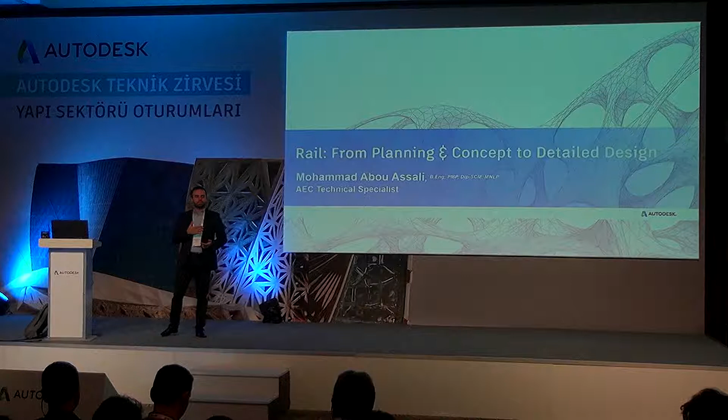I am a civil engineer from Lebanon. I just know a little bit of Turkish because I love Turkey, so I started learning Turkish this year, still in the first course. Okay?

Today's session is about infrastructure. The first session will be about rail design. The second one, we will talk about road rehabilitation. And the third one is going to be about construction planning - how we can use InfraWorks to basically manage the construction site and analyze how we can, for example, lay the site, get the construction vehicles into the site, etc.

So the first session is about rail. As you know, we have too many rail projects going in the region. Specifically, if you go to the Gulf states like Qatar, United Arab Emirates, you will find a lot of projects, and even in Saudi. Definitely that's the same case in Europe as well.

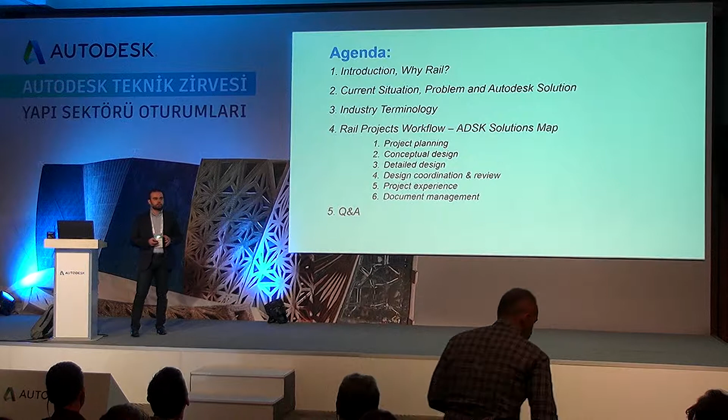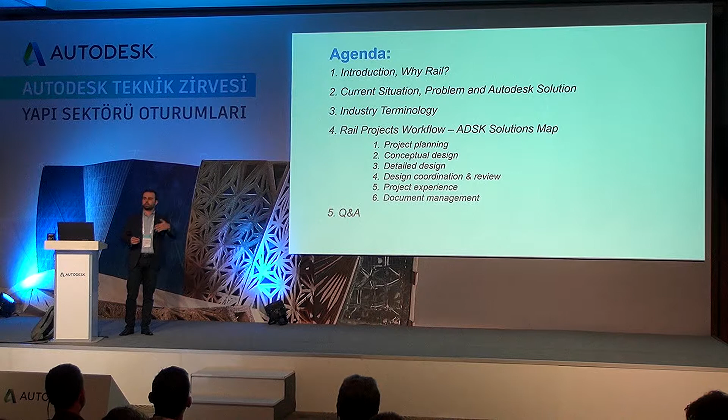So today's agenda will be like this. We'll go about what is rail, what is the situation, the current problems, what is the industry terminology for those of you who don't know about rail. Then we'll go about the rail project's workflow, because with Autodesk, we have many different tools, many different software, and these tools speak to one another - we start with one, we move to another, to a third one, and so on. And finally, hopefully we'll have some time for questions and answers.

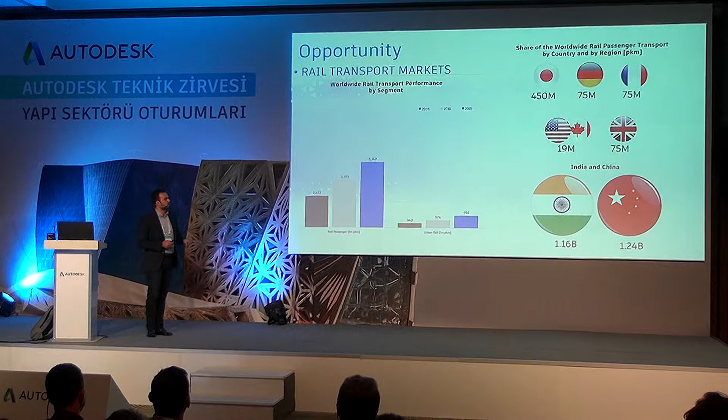So why rail and why now? If you check worldwide, there are many studies done by companies like McKinsey and others about the investment in rail projects. If you look at this part, it's about rail passengers per kilometer per hour. You see there is an increasing trend from 2005 up to 2025. All of the countries in Europe, even Canada and the States, are investing heavily in rail. And the biggest investment in rail is being done currently in India and China.

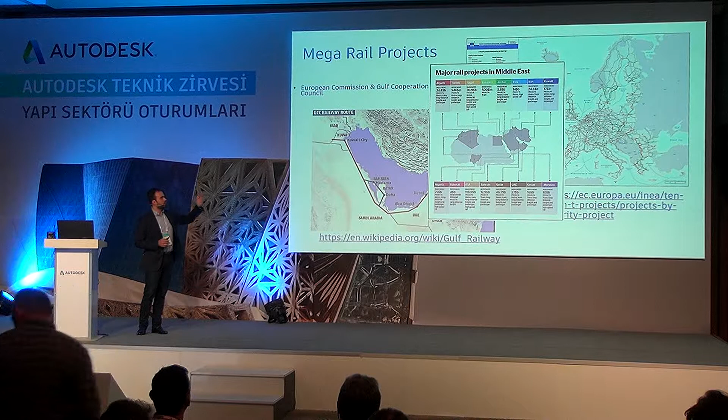In the Gulf region, there was a very optimistic project of connecting all the Arab Gulf states together, but due to the fall in oil prices and the tensions over there, they stopped it for the moment. A lot of investment is going in Europe, with the European Union connecting all of the major cities together. Even in Africa, if you check the studies about Kenya, East Africa, and even North Africa, we do have a lot of projects involving rail over there. So billions, hundreds of billions of dollars are being invested into rail projects worldwide.

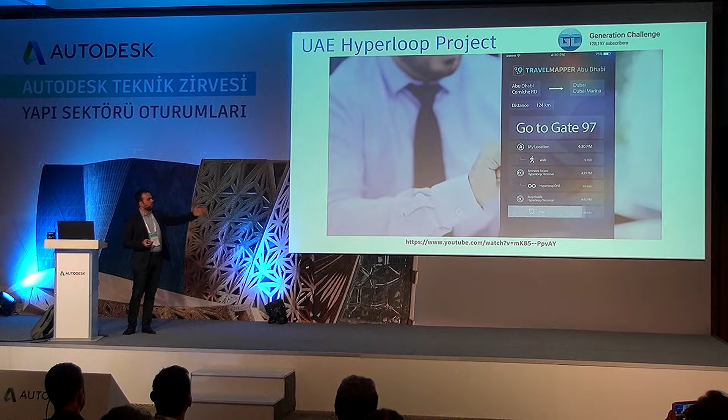Another example of a very futuristic project - I don't know if any of you heard about the Hyperloop project in Dubai. It's basically connecting Dubai to Abu Dhabi. So what they're planning to do is connect the capital, Abu Dhabi, to the city of Dubai using a very futuristic technology of a tube with cabins that move at very high speeds. By just booking your cabin, you're able to move from Abu Dhabi to Dubai in a matter of minutes. Usually nowadays, going from Dubai to Abu Dhabi takes around 1.5 hours. They're planning to reduce this time to around 12 minutes, so just 10% of the time.

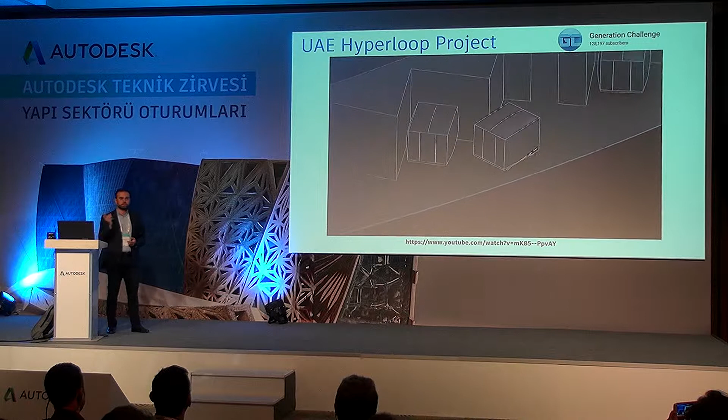And this project is actually being tested. The company working on this Hyperloop project has developed some prototypes, and they're checking those modules or cabins inside the pathways at a very, very high speed. So these are the modules which people get into, and these modules move into a certain container, and that container goes at speeds of 500, 600, and maybe more kilometers per hour.

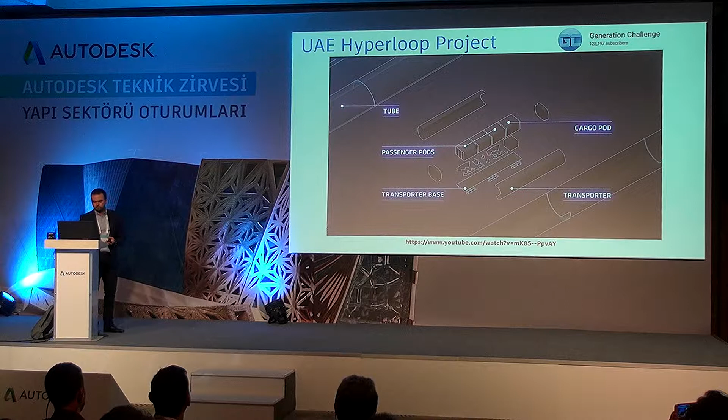So this is where we're heading. This is a rendering of how the Hyperloop tube will look like. As you can see, they're tracking the time from when the person goes from Abu Dhabi to Dubai, till the time he gets to Dubai, which is going to be monitored with stations and other things as well - reducing the travel time by 90%.

So a lot of disruption, a lot of new technology, but what are the problems? We do have a lot of problems nowadays in our world, and it's more often that the engineers working on vertical construction, like architects who probably will design the metro stations, and the civil engineers who are working on the rail tracks, the horizontal alignment, would like to coordinate or collaborate together.

So the major products from Autodesk that highlight those issues are definitely Revit for vertical. We have Civil 3D for the rail tracks.

We have the BIM 360 platform for collaboration, Navisworks for clash detection, and InfraWorks for project communication and visualization. If you look at official Autodesk presentations for rail design, you're going to find something like this. I'm not going to bother you with this, I've developed something more enhanced which I'll share with you in a couple of minutes.

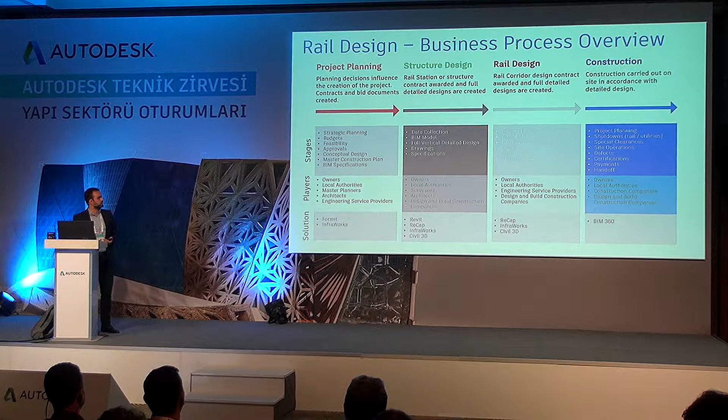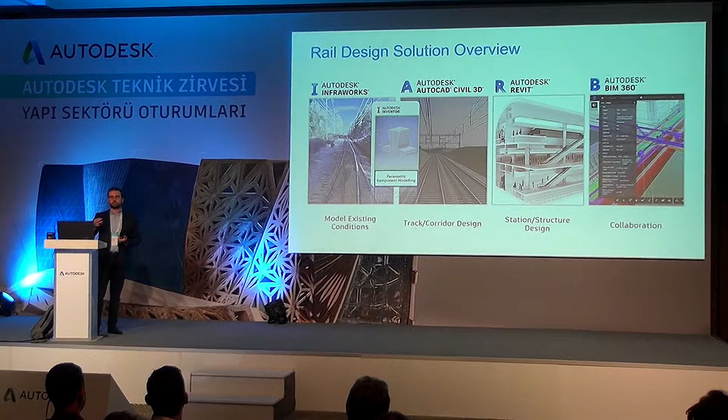Like any other construction project, we go from planning to conceptual design, detailed design, and construction and handing over. This is the typical workflow: we start with planning or conceptual design in InfraWorks, move the rail design to Civil 3D, design the stations in Revit, and then collaborate on all these models in BIM 360, for example Docs or Navisworks. We also have Inventor, which allows us to create parametric objects used in the design process of rail tracks.

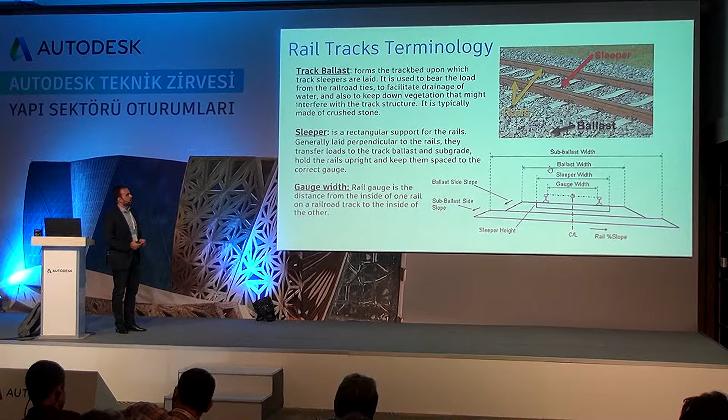So what about rail terminology? For those who have never worked on rail projects, a quick introduction. Since we're designing rail tracks, we have two rails, the sleepers, which are basically plates that hold the rails together, and the ballast material, granular material that sits underneath and takes all the vibration and motion from the metro or train.

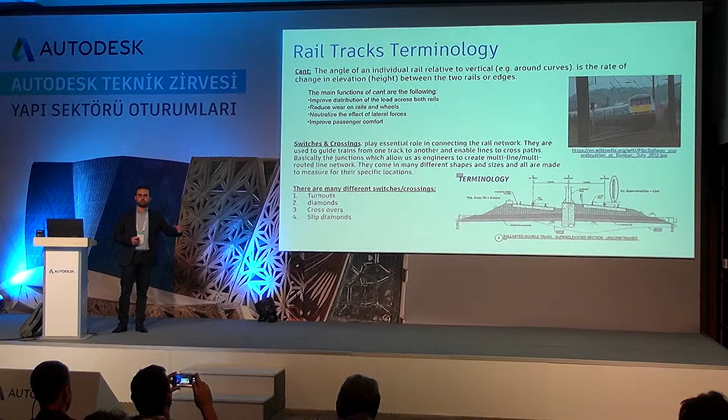Same as we have terminology for road design, we have terminology for rail track design. In road design we talk about super elevation; in rail track design we talk about cant. Cant is the counterpart of super elevation, basically the difference in height between the two rails, since these rails sit above one another.

Switches and crossings are basically any intersections between rail tracks, and there are many different types: turnouts, diamonds, crossovers, slip diamonds. Think of them like the different types of interchanges or intersections in road design. These are selected depending on the speed of the train, the situation, the surface, and other aspects.

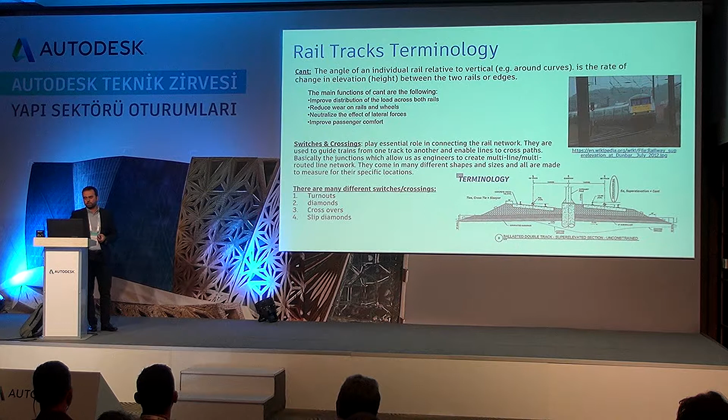To give an example of a switch: this is a switch, basically changing tracks, and the crossing is further ahead to direct the train from one track to the other. These can also be modeled and designed nowadays inside Autodesk Civil 3D, along with the cant component.

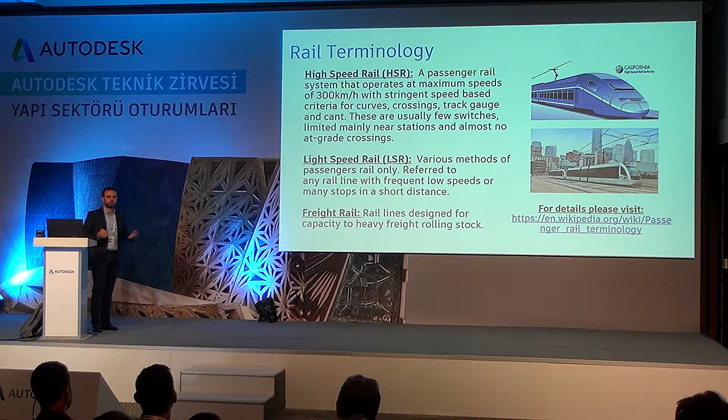Now, rail projects vary. We have high-speed rail, usually going at 300 kilometers per hour - we have some in Germany, Japan, and other countries. Most often we're dealing with light-speed rail, like a metro or tram network connecting city neighborhoods together. And definitely freight rail for moving heavy objects or big components.

So that was a quick introduction about rail terminology. What I've put together is what we as Autodesk would advise people or designers to do. I've started with the project planning phase and highlighted the tools we usually use during that phase for rail design, and for what reasons.

If you look at project planning, we would like to have an idea about the existing conditions - how do we get all the surface data, what are the objects, the buildings, the city furniture like street lights, etc. There's also GIS integration, because most municipalities or governmental authorities have their data stored in GIS platforms - how can we bring that data into InfraWorks and start the planning process?

What about suitability and feasibility analysis? What is the best alignment for that rail track or rail network? How can we leverage the 2D and 3D world together, and check estimations about land usage, since the track will pass through certain lands or territories, and we may need to acquire or purchase those lands from their owners. All of this can be done using tools like ReCap, InfraWorks, and Civil 3D.

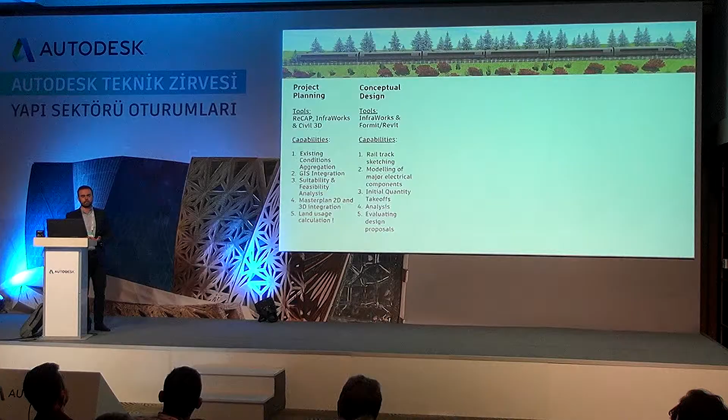Once we move into conceptual design, we use InfraWorks and Revit, or Formit if needed, to design the conceptual rail track and the station. I won't go into each one since we'll cover them shortly. We move from conceptual to detailed design - this is where we use Civil 3D instead of InfraWorks, or take whatever we created in InfraWorks and use it in Civil. For the design review process, we use Navisworks Manage ideally, or BIM 360 Docs in the cloud.

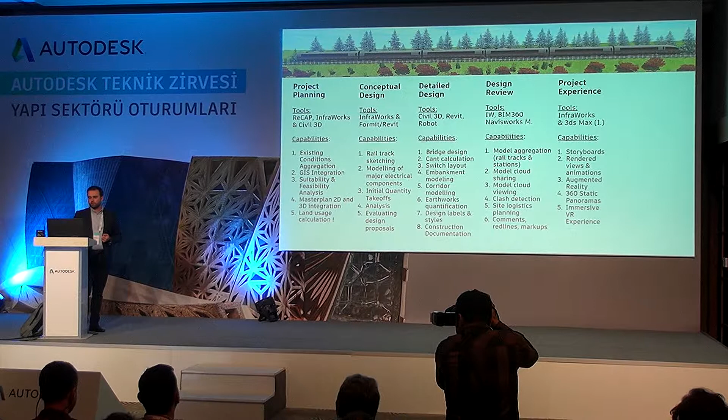For communicating the project to a stakeholder or a client, there are multiple ways. We can generate snapshots, we can do storyboards, animations, push that model to VR or virtual reality experience, etc. There are many ways we can do so. And I'm going to share with you one interesting case from Europe about virtual reality for rail projects.

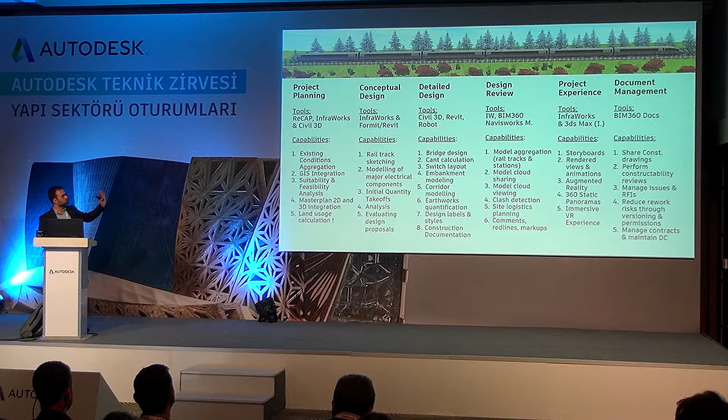To tie all that together, we need some sort of document management system, because too many stakeholders are working on this project. They will share documents, they will share models, and they need to communicate. This is the recommended platform, BIM 360 Docs. I think most of you already know about it. So that's typically the workflow with the tools and the capabilities or challenges.

So if we move to project planning, by the way, this screenshot is taken from InfraWorks. How many of you already know InfraWorks? Can you please raise your hand? Not too many. Okay, so in my second session I will open InfraWorks, do something cool with it, and let you know more about it, since we have more time than this session. But basically, this is a sample conceptual rail track taken from an InfraWorks model.

So why InfraWorks for conceptual design of roads, bridges, tunnels, and rail tracks? Because InfraWorks is a relatively new and advanced technology, not based on AutoCAD. So we are able to create models that are huge, going up to thousands of square kilometers. Imagine if you want to have the whole model of Istanbul, or even the whole model of Turkey, in one single place.

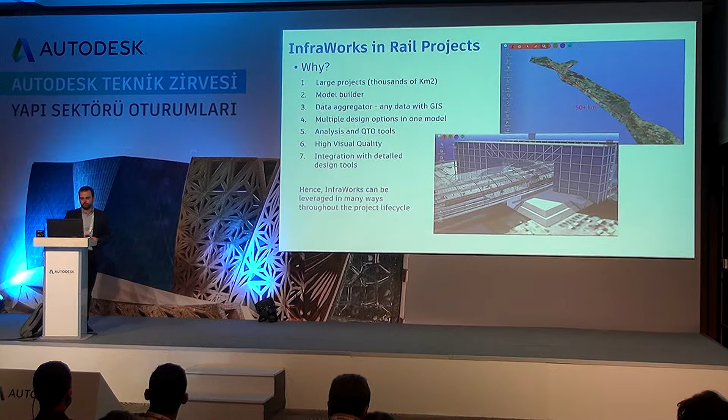You can do so using InfraWorks without having any crashes or any problems. The same goes for aggregation of data. We can bring data from any source, whether you're an architect working with SketchUp, Formit, or Revit, or even a model in 3ds Max. You can dump it or import it into InfraWorks, and it will show in its right location, to the right scale, with the right material. So these are just a few benefits of using InfraWorks.

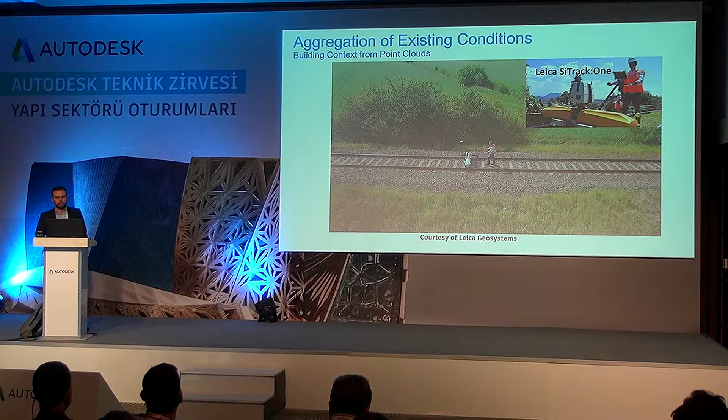And the technology of capturing existing conditions is evolving. This is just one piece of equipment provided by Leica, and what they do is basically scan existing rail tracks to an accuracy of 1 to 2, or maximum 3, millimeters, then convert that scan of the rail track into a BIM model, which can be leveraged later for facility management or maintenance, or anything you can think of.

So there are dedicated tools for the rail project, starting by capturing the existing data like this, or even by bringing the data into different platforms like Civil 3D and InfraWorks and others.

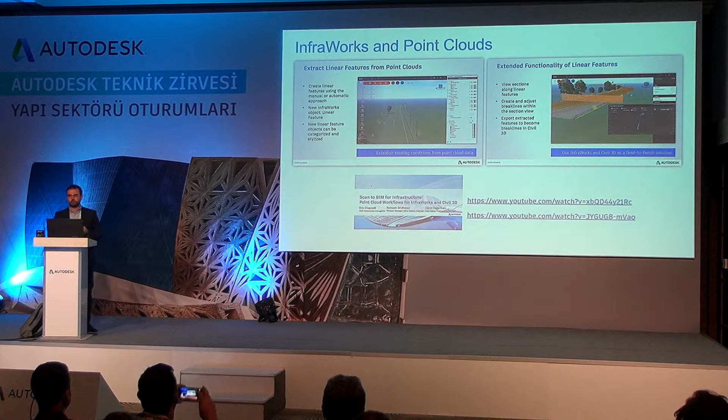So how many of you already know about laser scanning? Laser scans, point clouds? Okay, also not too many. If you want to know more about laser scanning, there are two major webinars delivered by Autodesk employees, available online on the InfraWorks YouTube channel. You'll find many different videos about the topic there. Unfortunately we don't have time to cover it today, maybe I'll cover it in my upcoming session.

So once we use a laser scanner instead of a total station - for those who know about surveying, instead of a static equipment reading a certain point - I just place a laser scanner on the site, and it will scan the whole site in a matter of minutes, bringing back billions of points. So instead of capturing single points, I bring billions of points with all of their intelligence. That intelligence can then be transformed into a BIM model, or, as you see at the bottom right of the screen, a classification of the point clouds which I can leverage in many different ways and formats.

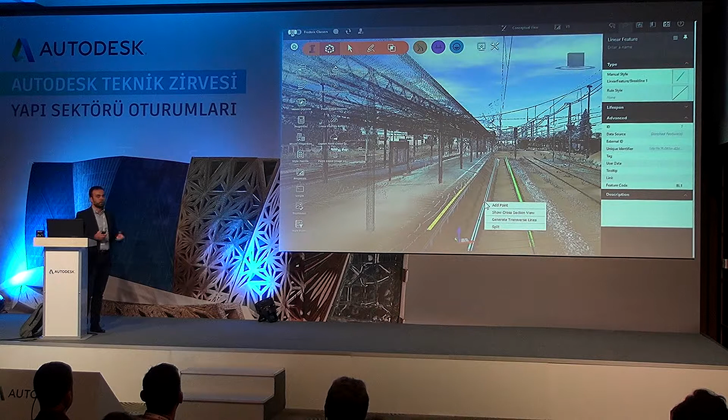For example, I can scan an existing metro or railway station, and directly inside InfraWorks, the software will detect the rails themselves - I don't have to be smart or pick points. I can even check the cross-section using the point clouds, and if need be, place certain points to create what we call break lines, which I can use later on in the Civil 3D platform. So this is just an overview of capturing the existing conditions.

We have the existing conditions. Let us start with the planning of the project.

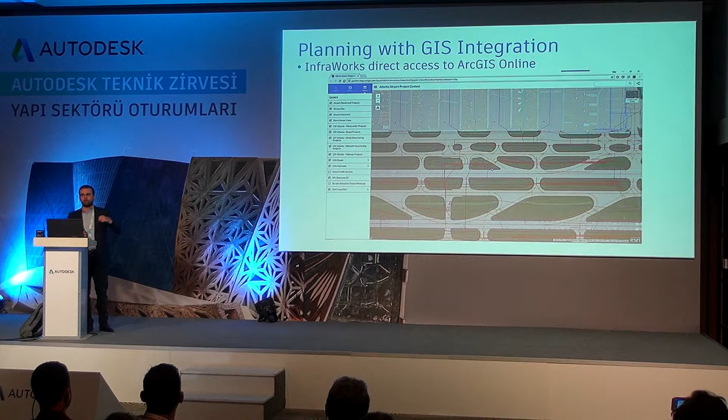Since this year, anybody with an active subscription of AEC Collection will have a free license to access the ArcGIS online database. By doing so, you'll be able to pull that data from the cloud inside InfraWorks and develop it into a 3D model, which is a 3D representation of whatever GIS data is in the cloud, enhancing the planning process.

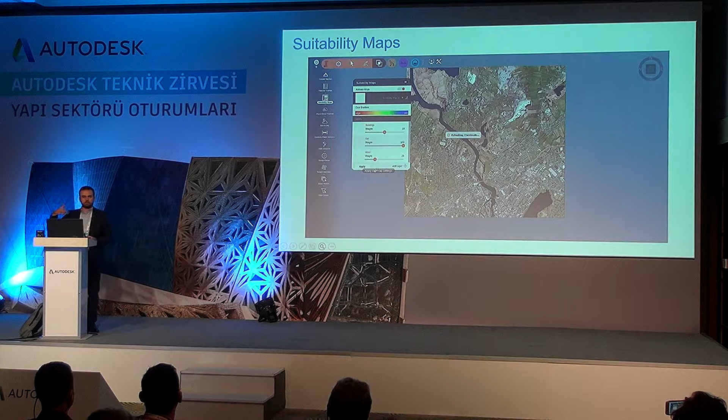We can also leverage suitability maps. We already know the rail project consists of rail, tracks, and stations along the way. This simple tool within InfraWorks allows us to put in metrics or criteria - I can specify buildings, major roads, or structures. Then I ask the software to highlight in a heat map the best locations to place my station, close to stadiums, schools, or places where people gather in big numbers. It runs this analysis based on criteria with weights, and the end result is something like this - the best location would be around that red area, while blue areas may not serve the purpose. Again, this helps us throughout the planning process.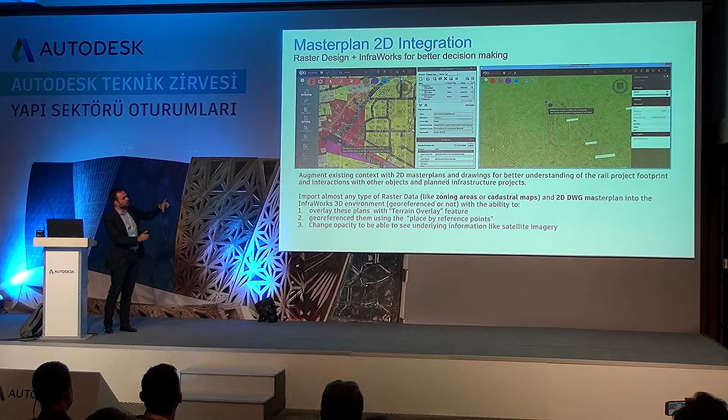The same applies if we have something like AutoCAD - a master plan in AutoCAD, even if it's 2D without elevation. We just bring it into InfraWorks, and using what we call the rubber sheeting process, we pick certain points - point 1, 2, and 3 - and correlate or transform the image to fit the model we have in hand. From there onwards, we can start to plan our track or the placement of our stations.

So we're getting the point clouds, the 2D or 3D data, the GIS information. It's the era of information, and this is what differentiates BIM. So we've done the planning - what about moving into conceptual design? We want to start as designers to plan something real, in real life.

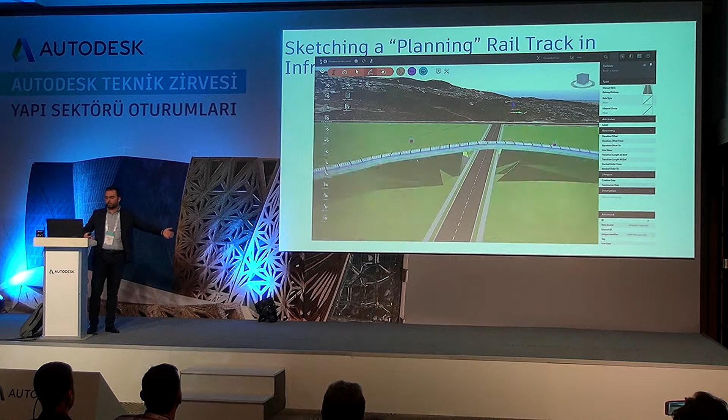We have too many different ways. We can basically use the rail track planning tool. Very quickly inside InfraWorks, using the basic functionality, by just clicking it also makes the crossing. I can change the elevation if I need an underpass underneath, and visualize and understand how the project looks, the total length of the rail track, etc. This is the lowest capability in InfraWorks - not the recommended workflow. This is for someone like a planner in a governmental entity who just wants to sketch something quickly.

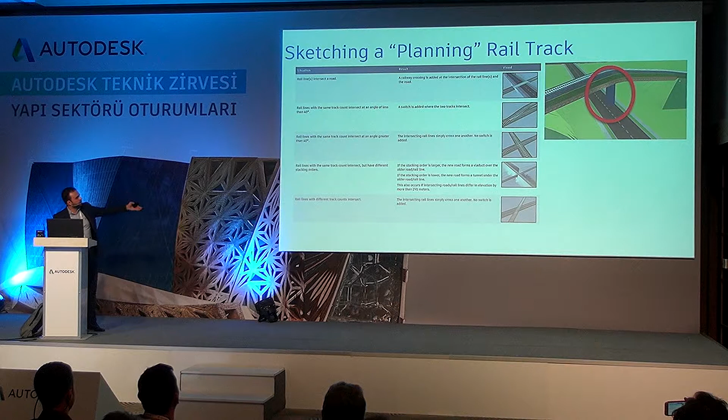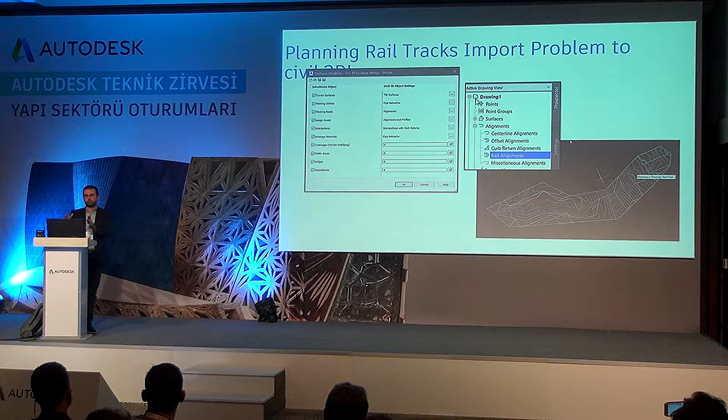The best way to do it is using something else which we call component roads. The software will create some intersections, but there are limitations we need to overcome. We definitely support not only rail tracks on the surface, but also above and underneath. If we have any tunnel, using parametric modeling, we can change its shape, width, height, and other parameters. Now the problem with the planning rail tracks approach is that we cannot bring that model into Civil 3D - that's why it's only good for quick master planning. So these are the limitations.

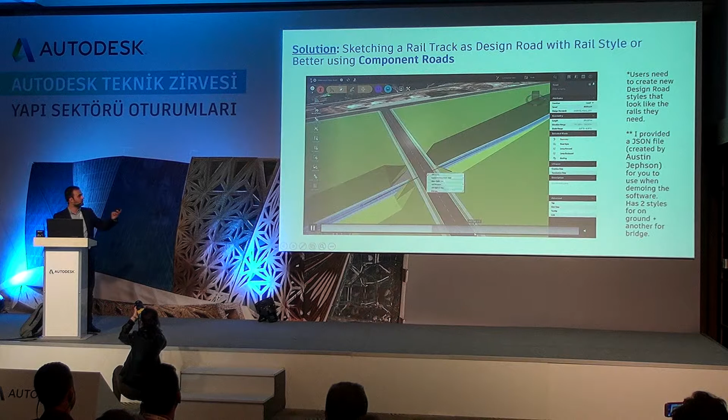Then we move into what we call component roads - the most advanced and intelligent roads inside InfraWorks. We activate them from the road module. We pick component roads or design roads, and then pick certain points from one place to another to create the rail track. This is actually an old video I created before component roads were introduced, but you'll see you're able to change the style more often, change the geometry because you have elevations, and it will create intersections and other features as well.

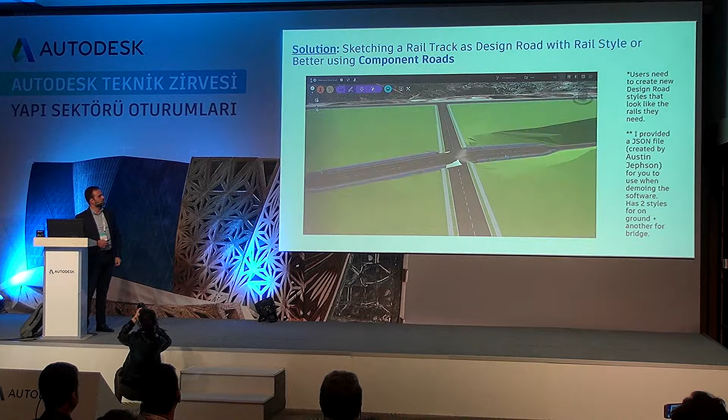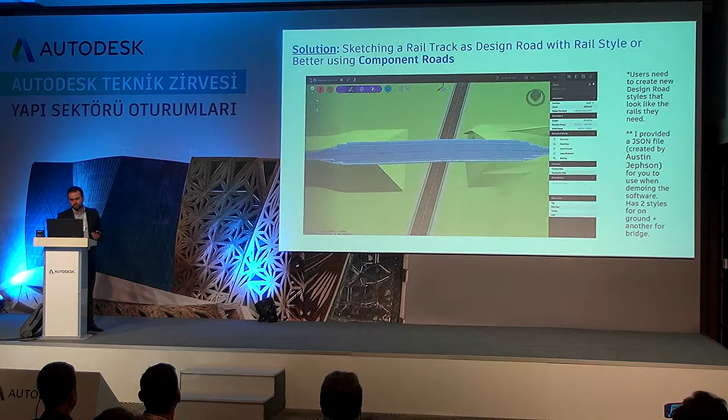So let me suppose I want to create an overpass over there. I can apply a bridge from this station to that station, and a sound bridge will be there with the deck, the pier, and other components. In this case, because it's a very short span bridge, it did not create any piers, but we can add piers if we need to.

So just an example, we have a polyline that resides in Civil 3D. But this is just a polyline - there is no corridor, no intelligence whatsoever. So we can break that polyline into certain segments, and then we can basically import it into InfraWorks.

We want it to be on the grade or above. Just minor configuration. Once we hit the apply button, we're going to see our rail track showing in 3D as a 3D model inside of InfraWorks. So this is another way of showing whatever is 2D in 3D in a 3D environment like InfraWorks.

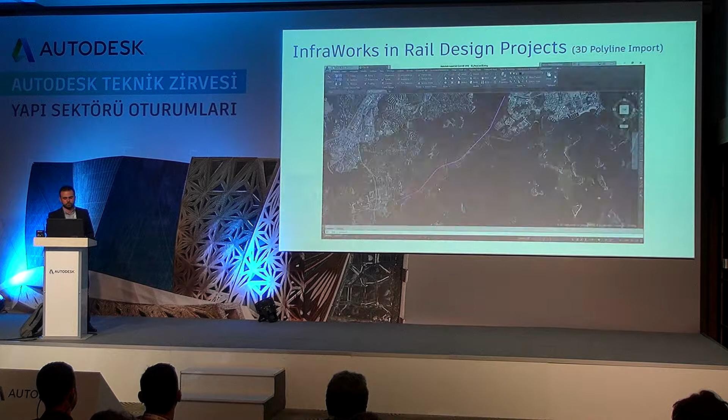Another thing, what if we have a rail track and we're using the design roads? I'm going to skip this because it does not apply anymore since 2019 - InfraWorks 2019 design roads is not supported anymore. So this one does not actually work anymore. We don't have that capability.

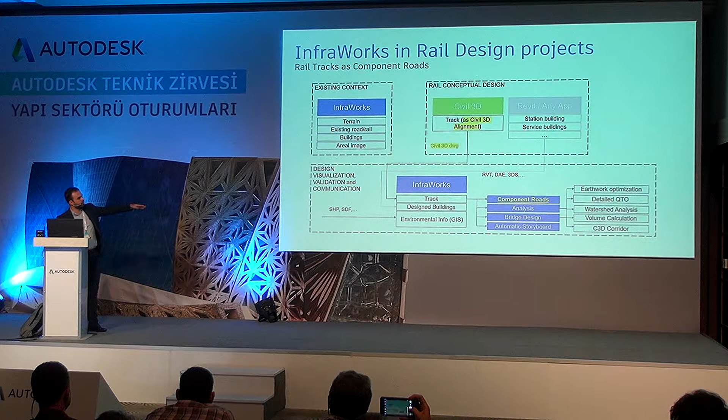Basically, we were able to do some more editing regarding the style. What I care about is the component roads. So how can we create an intelligent rail track using component roads? Again, there are major benefits of using component roads, but I'm not going to talk about it now. If somebody is interested, I can share the presentation later on.

So with component roads, as you can see, we have detailed rail tracks that also have maybe underground components. And that component road will also give me, as a designer, all the required annotation - what are the stations, what is the curvature at a certain point, etc.

It will also help me create the necessary grading. So depending on the type of material, the cut or the fill, I can specify. For example, the cut stability slope is 3:1, the fill slope is 2:5, for example. And once we apply it from one station to another, it's going to update the whole model.

Not only that, we can change the type of component for material takeoff issues and for visualization issues. As you can see, just simply click from one station to the other. I can apply a style to one track or both tracks or all tracks at the same time. Making some modifications, as you can see, the update is directly in 3D.

We have sections inside of InfraWorks because we want to design not just in a 3D environment. As designers, we would like to see the cross-section, understand how the profile or cross-section is doing in terms of cut and fill. We can exaggerate that like we do in Civil 3D. All the necessary tools to get all the quantification and required analysis.

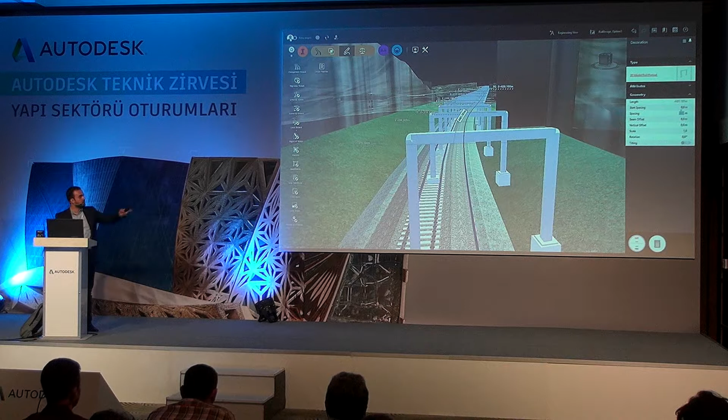So it's all parametric modeling. We input a parameter and everything updates in 3D. Once we get that right, we can move further for visualization purposes and then animation.

So what if we want to create an InfraWorks 3D rail component from an AutoCAD? Let me just go back one moment. So in this video, we had a very specific rail track design. Let me move a little bit here. As you can see, we have only one track, we have one type of gantry, we have a certain width, certain type of sleeper. Remember, the ballast material that sits underneath.

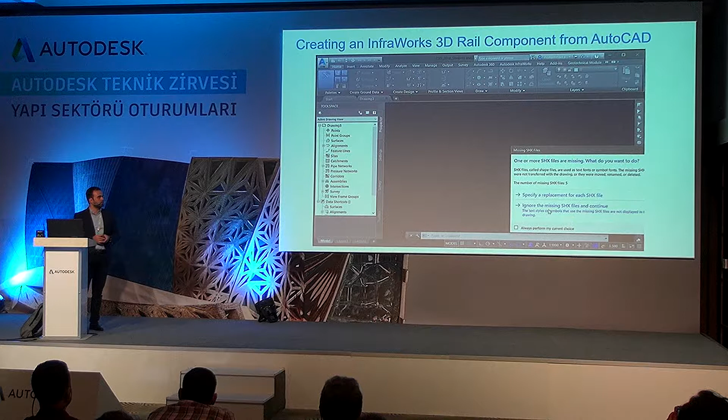What if we have a certain design that's recommended here or required here in Istanbul or Turkey? This is how we do it. If it's not provided by the client or the owner, very simple - we can create a very small section of it in AutoCAD or AutoCAD Civil 3D, as you can see over there, basically a 3D model.

Export it to SDF or FBX file format, and then we read it into InfraWorks, as you will see here.

So here I'm just creating a component. Think of it like sub-assemblies in Civil 3D, for those of you who use the sub-assembly composer. I'm doing something similar in InfraWorks, but it's highly visual and extremely easy to do. You can see just by picking some tips and clicks here and there, I'm able to create the ballast material with the right slopes, and see the effect visually, adding as many components as I like.

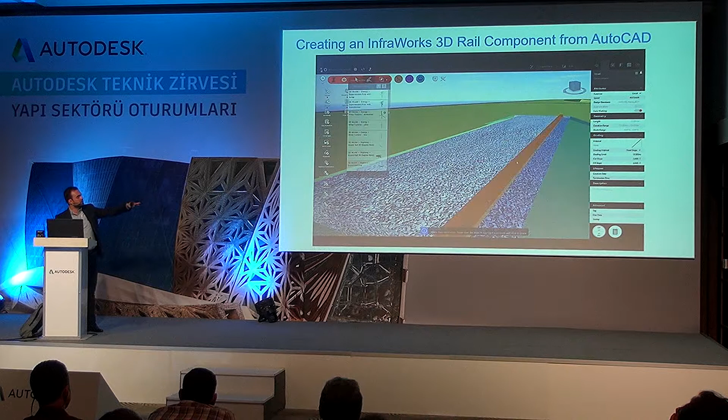Bring in that 3D model that I've created in AutoCAD, and then it's already saved in the library of InfraWorks. Here we just ask, please InfraWorks, add this component, and as you can see, it's available as a 3D model. Where do you want to place it? At which location? Maybe we need some rotation over there.

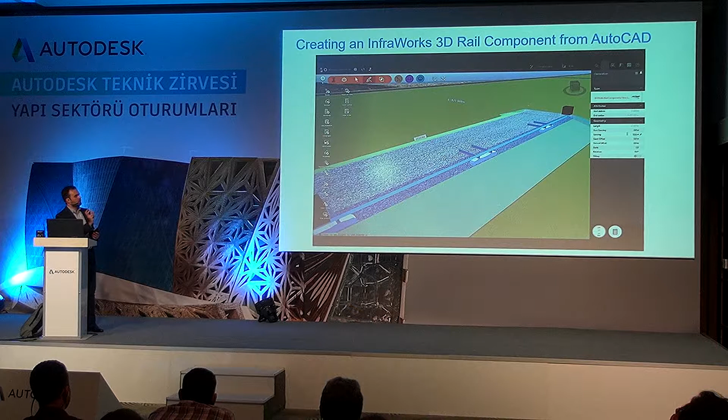So basic 3D modeling. But the good thing is this is in 3D, taking in the materials, taking in the exact length, height, and width. And once we're done, just to save your time, we're going to end up with something like this, which we can basically save. See here?

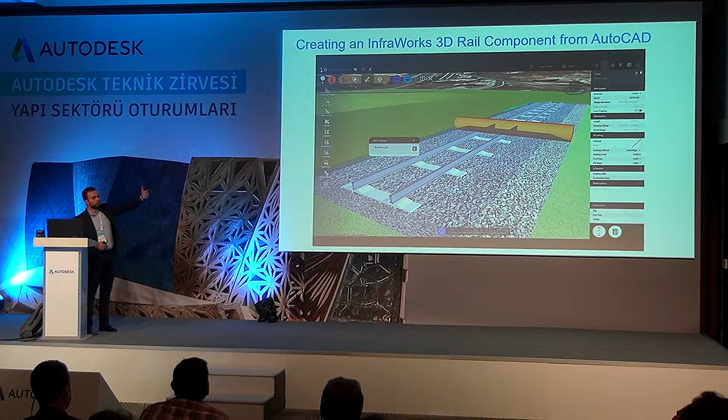So I'm going to save it. I want to save that sub-assembly or that cross-section into my library, and I'm going to use it as a designer in all of my upcoming projects. So you do it once, you use it all the time. That's the power of BIM.

What about project analysis? So we've modeled something in Civil or InfraWorks. We created the rail track, but we want to give a feel of how much it's going to cost. So with very few clicks, we go over to the calculator after picking the rail track, and we get a full quantity takeoff of all the components used in that rail track.

And remember, it's not just the rail track itself. Even if you look over here, any portals, any of those gantries, any signboards, or any equipment you put on that rail track will be quantified in a few seconds. You can hit the generate report button, and that will fire up a CSV file, which you can open in Excel.

So definitely if I change the width of all the columns, I'll have each and every component, what is the width, what is the height, what is the volume of that component, which then I can link into an estimation software for cost estimation purposes.

Also within InfraWorks, we do road design, bridge design, rail track design, but also we can analyze the watershed analysis. So instead of just picking a point, we can analyze the whole area, and using the power of the cloud, of the infinite computing, Autodesk will send you the watershed analysis for your entire model.

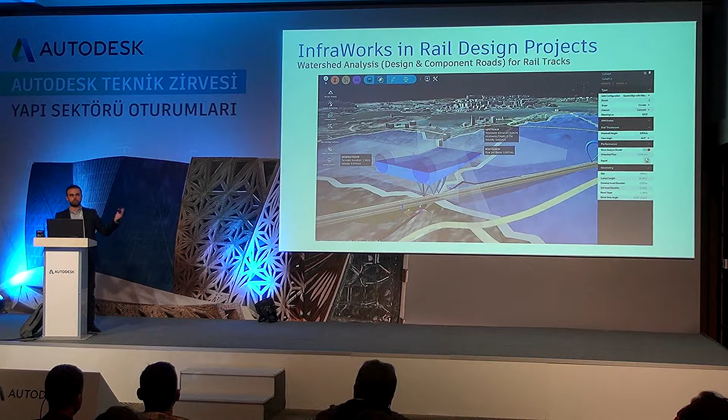Once we're done with that, we're going to do some land calculation. So we're done with the conceptual or preliminary design inside of InfraWorks for a rail track. And by the way, we can edit the profile very quickly, like we do in Civil.

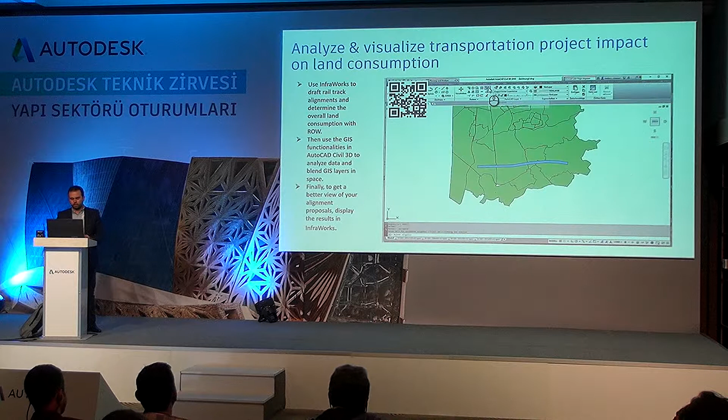We bring that model or that alignment into Civil 3D, and using the Map 3D functionality of GIS, we put it on top of the parcels or lands, and check the intersection with the right-of-way. So this rail track with the right-of-way, how much land should be consumed or acquired. That can actually be generated into a report. And finally, we can bring it back into InfraWorks for visualization.

Getting the existing conditions, planning, conceptual design, what about detailed design? In detailed design, this is where we use two major products.

We use Revit to do all the structural components like the metro stations. For example, the Qatar Rail project, worth about $40+ billion, all of the metro stations in Qatar were designed using Revit.

Deutsche Bahn in Germany, same thing. There is a study published online, I think it's in German if I'm not mistaken, but you can check the link, and there are also Revit models from some of those stations available online. This is just one of them, so you can download that simple station and see how Deutsche Bahn used Revit to design the metro stations.

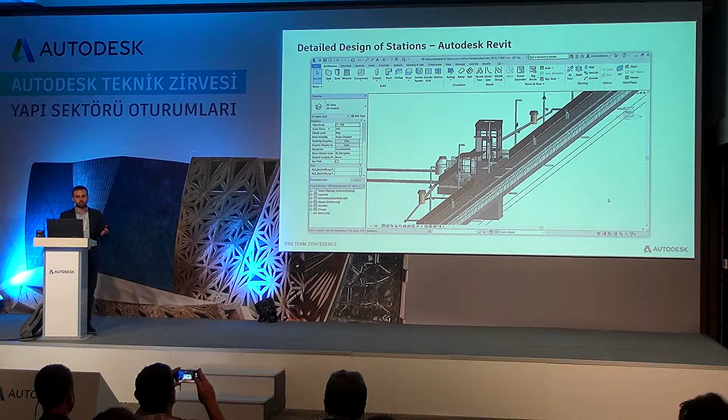So that's for the vertical or structural components. Then we have to do the horizontal component. Since 2019 or 2018.2, we're starting to have more rail design capabilities inside of Civil 3D, one of which was creating the rail turnouts, and recently we're able to support the cant and sub-assembly composer.

Inside of Civil 3D, we go into the details. We have the conceptual rail track alignment. We use the sub-assembly composer, or if we have any other assemblies saved, to create the corridor, to change maybe the alignment, and definitely generate all the construction documentation - plan, profile, cross-section, what have you.

This is just an example from the latest webinar that the Autodesk people posted online. I highly recommend that you go on YouTube and check the videos, specifying step by step how you can basically create an alignment inside of Civil 3D for a rail track. You find at the top there is a rail tab, and then you specify your parameters.

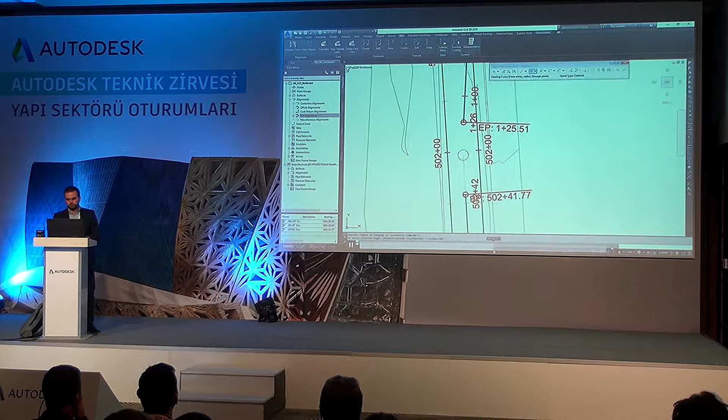With the cant calculation, you have a tabular format, which if you change, everything in 3D will update. You generate the profiles like we do with road design, and you can definitely create a corridor and cross sections as well.

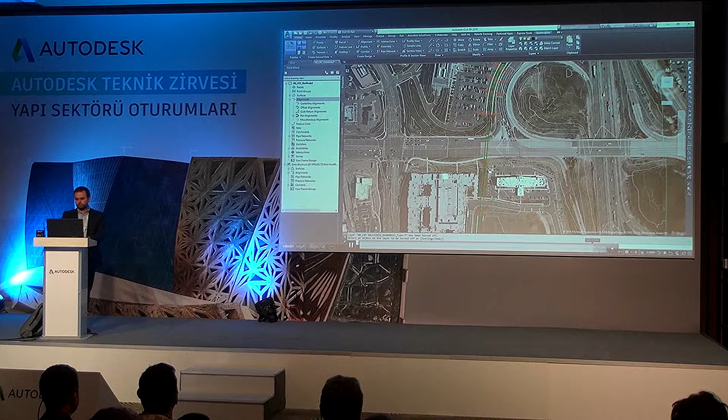Now we do have built-in sub-assemblies for rail, introduced recently, and we can change that sub-assembly visually and physically to target certain objects. We can also create sub-assemblies for things like overhead or rail tracks going above the ground in a bridge format, or even tunnels. All of that serves not only for quantification, but also for construction documentation, drawings production, and visualization.

So it's just an example of the sub-assembly composer, which would require some visual programming and sometimes scripting, so that you'll be able to modify the links, the points, and the shapes to interact with one another in certain fashion.

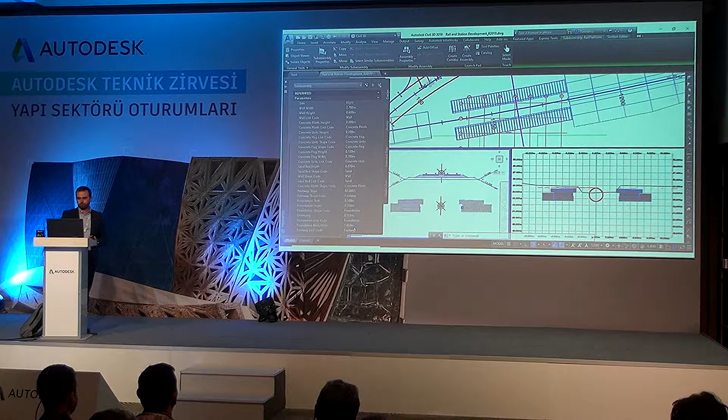Once you're done with all that, like in this case, you create the grading, you check the cut and fill quantities, the volume report for the whole rail track, then you can connect with the estimation software, and you get the cost in dollars or Turkish lira or what have you.

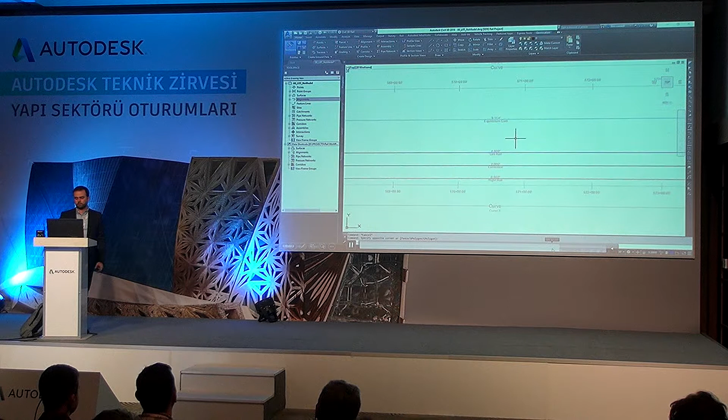All types of reports, parametric, you can change and everything updates, and definitely, as I mentioned earlier, the drawings production. So this is, for example, the final layout of our model, which if we like, we can directly bring into InfraWorks and visualize it in context, if we'd like to create maybe some animations or screenshots in 3D. So that's the same alignment we finally detailed inside of Civil 3D, and this is how the project will look like in real life.

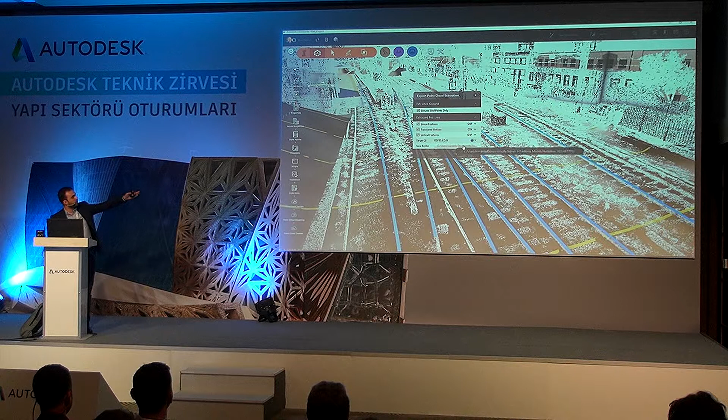Sometimes we have an existing alignment, and this is where we use some other workflow. So instead of basically designing everything from scratch, we use the point clouds, as we've seen earlier, inside of InfraWorks. We capture those feature lines, as you can see the blue ones, and specify them as break lines or other features, then bring all that into a format that Civil 3D can read, and we can export into many different formats. Those lines come into Civil 3D, and then we can start the detailed design process.

So either or - either you have an existing rail track, or you're starting from scratch. Whatever the case, there are workflows and tools that will help you do the job.

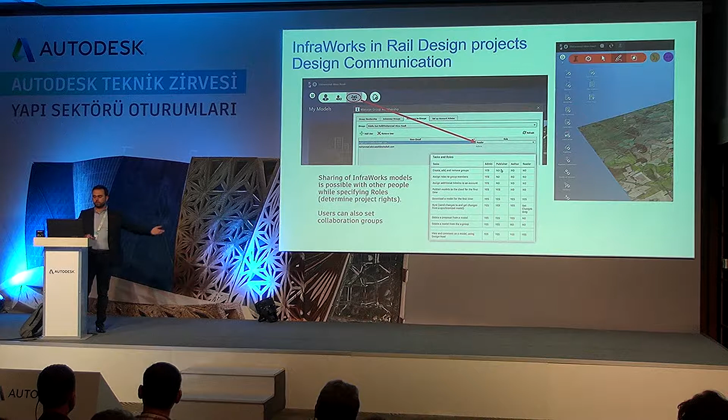Coordination and review: inside your InfraWorks model, you can share the model with different designers within your team, but the only limitation is that if you're working with a group of engineers, only one person can edit the model at a single time. So let's suppose I'm working with my colleague - if I want to edit, he cannot edit the model. Once I'm done, I close the model, and he will be able to open it and work on it as well.

This was just a technology that was available about the iPad app - we used to push the models from InfraWorks to the iPad app for visualization. That's not supported anymore. And there was another web viewer where people could view InfraWorks models using any web browser. That's also not available anymore. Just wanted to highlight that.

But now we are using the BIM 360 platform, so we can push a light version of the InfraWorks model to the cloud and do simulation or some design review.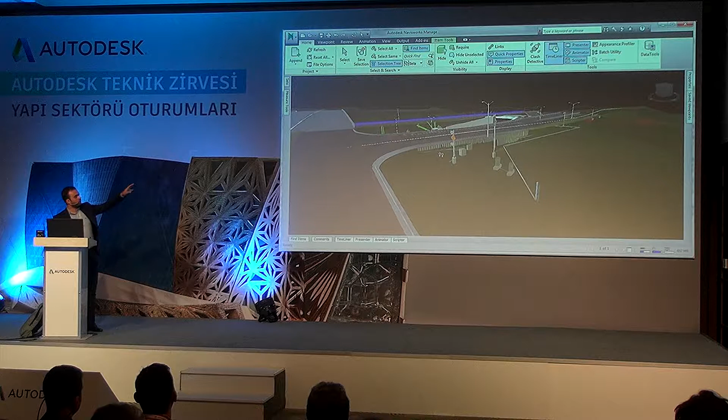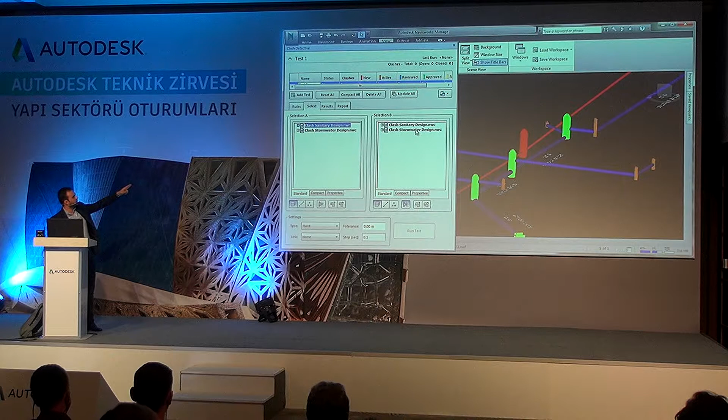Now, after we're done with the detailed design, we want to check for clashes. I know this video is more related to road design, but inside Navisworks we have all the disciplines - the road, the tunnel, the structural, even the utilities underground. What Navisworks allows us to do as engineers is check for clashes, any problems between those disciplines. So by just activating the clash detective module, I have those materials or objects classified. I want to check, for example, the sanitary against the storm, or maybe water against electrical pipes.

Automatically, all the clashes will be detected. Once I hit or click on a single clash, it will be shown in the model in 3D. And once I click on that object, I can leverage or use the switchback functionality.

If I'm using Autodesk tools like Revit or Civil, by clicking on that clash, on the switchback, the computer will take me into the authoring tool - in this case, Civil 3D in the back end. It will show me where the clash is, so that as a designer, I'll be able to change it and then make sure inside Navisworks that everything is okay.

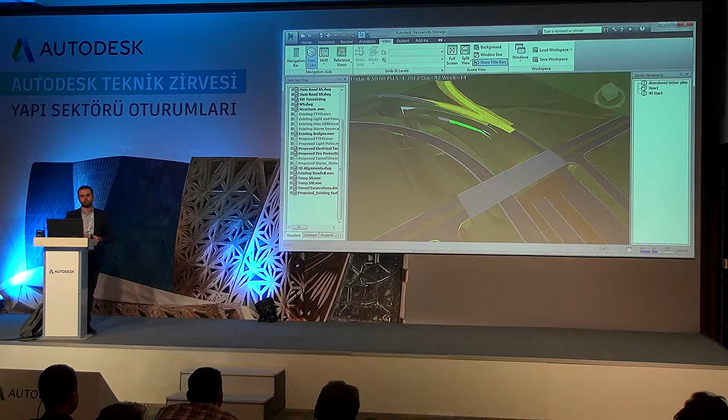We can do 4D, 5D sequencing of the same rail track project, showing how we will go about building the rail track, at which date, time, week, etc. For the construction planning, we can also leverage the visual effects or visual capabilities of InfraWorks to show visually how the construction will be done, by taking snapshots or even creating simulations.

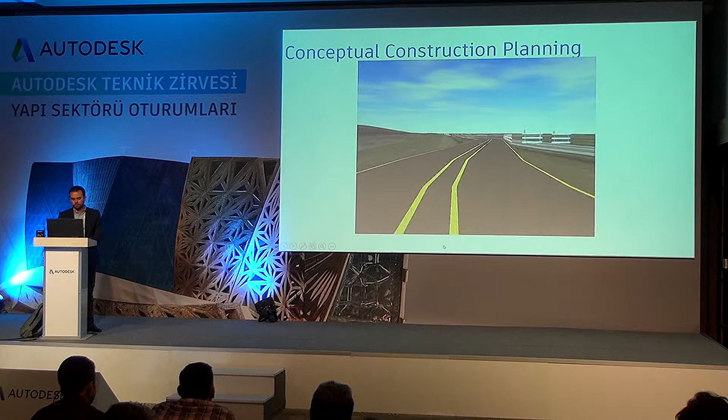So for example, this is just a very simple process of showing how we're going to create a road diversion, and we're going to talk about this deeply in my third session about construction planning - how we create these, how we do the simulations, and how we can use them to get approvals very quickly.

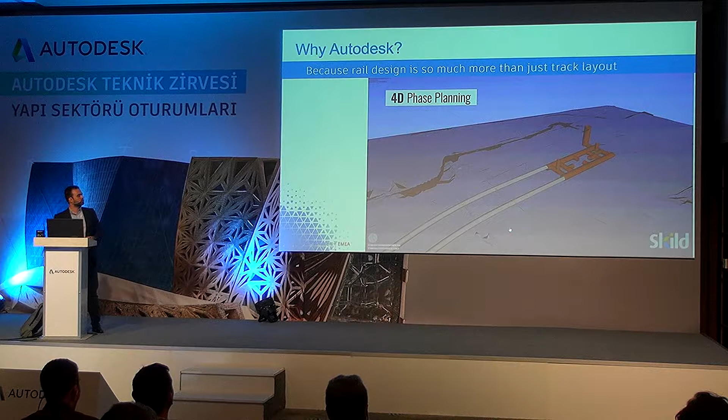That was the example of a rail track. This is an example of a station - same thing. We want to analyze as MEP engineer, structural, or architectural, that we don't have any clashes or issues. And we can also simulate the construction in 4 dimensions of that metro station as well, using the same technology of Navisworks. So Navisworks serves 2 major functions for us: clash detection and management, and 4D, 5D simulation.

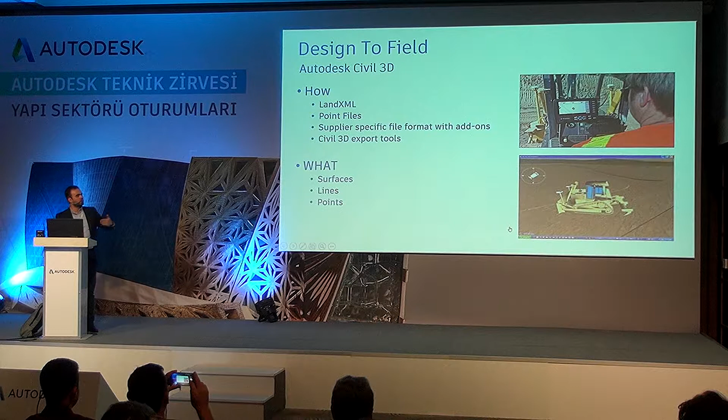After that, we're able to push the model for automated machine guidance. This is not used in our region unfortunately - it's used basically in the Nordics, Sweden, Norway, and Finland, where they push the Civil 3D model to a computer on the excavation equipment, and that equipment will be driving or excavating based on instructions given by the computer. So they reduce the number of people working on site. It's more safe because the operator of this equipment will not hit any underground utilities, and they will also achieve higher accuracy because the equipment will go 1 or 2 times and get to the exact right level.

Let's talk about project experience and visualization. So the same story about Deutsche Bahn - if you check online, they've actually put online some rendered 360 panoramas. And if you have your own mobile and a Google Cardboard, you can just scan this QR code and you will directly experience the model in a 3D environment. It's static, meaning you can't move, but at least you can see it 360 degrees.

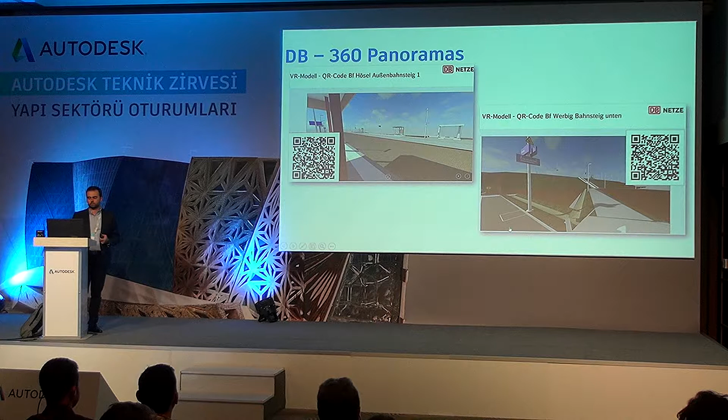And that can also be done from Navisworks or using 3ds Max, coming from Civil or InfraWorks, same thing. So it's available online for you to check later on.

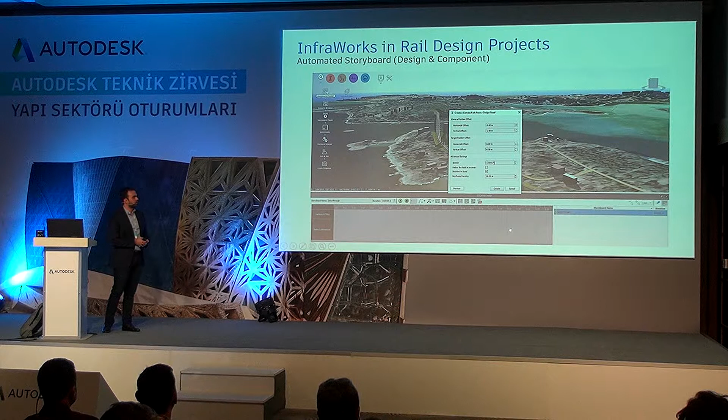Just regarding the animations, it's that easy. With just a few clicks, I want to create an animation for a rail track. I select the rail track, as you can see, and specify some parameters, like at what speed the train will be moving, which track I'll be driving on, or maybe as a passenger riding.

I hit apply, and in a second, all the keyframes over here will be created. Once we hit play, I'll be driving throughout that rail track at the speed I specified. I can then export that model into a video, which you can share with a client, put in a presentation, or upload to YouTube.

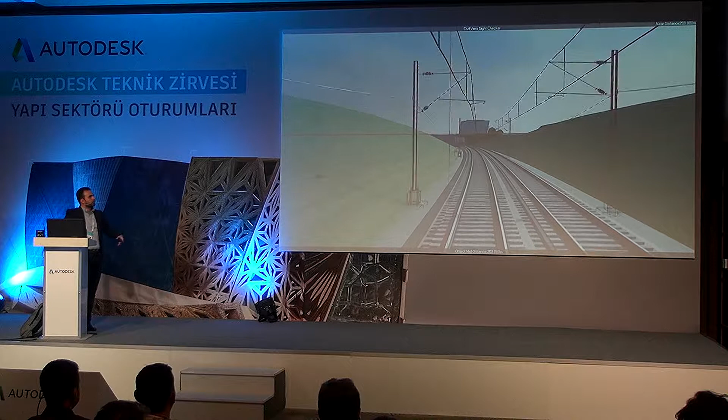Here's a sample of a rendered rail track. This is taken from InfraWorks into 3ds Max, and you can end up with something like this.

I'll skip all this and just show you some of the major success stories. This is really interesting: Norconsult in Norway was actually asked to design a rail network with stations.

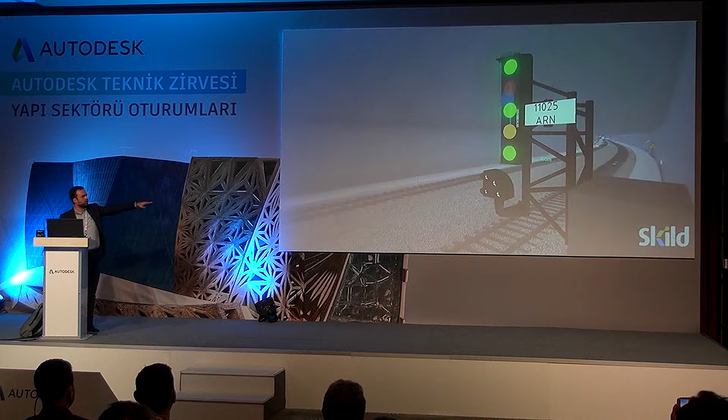They used BIM from Autodesk throughout the project, as you can see with the rail alignment. Once they developed the BIM models, they sent those models into virtual reality. So what you see here is a virtual reality of the rail track, the tunnels, and the signboards. By just wearing the VR headset, operators or people going into the service rooms can experience in real time how things will look.

If they open a cabinet, need more space for maintenance, turn on some switches, or move from one place to another, they can test it virtually. The complete model was put into VR, not only for the stations but also for the train itself. As if he's the operator of the train, he can look sideways and check what's going on. The same applies for passengers and everyone in the vicinity of the project.

They moved one step further, taking the BIM model and using InfraWorks Mobility Simulation, another tool, to simulate the movement of people, like what we saw today in the Museum of the Future in Dubai. They simulated the movement of people from one place to another, making sure the station could handle all passengers at any point in time.

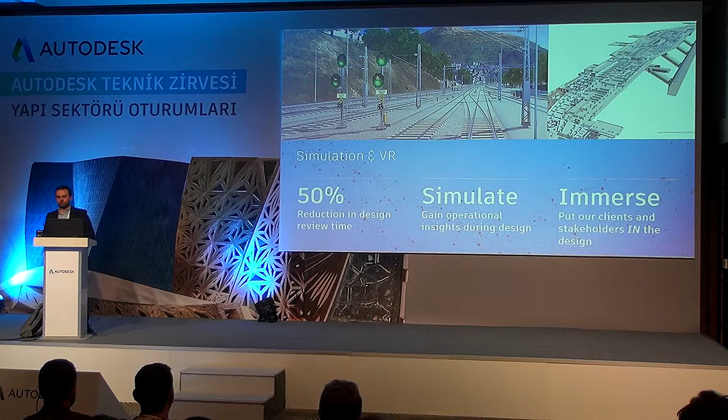They reported back to Autodesk, and it's available online, that they reduced the time of checking the design and getting approvals by 50%, because it became much easier for the client to understand what's going on, whether the design was valid or had any problems.

Finally, document management: as I mentioned earlier, we can push the InfraWorks or Civil 3D model to the cloud, and everybody with a username and password can access the model, make markups, add comments, or even create issues and send an email to a designer to take action.